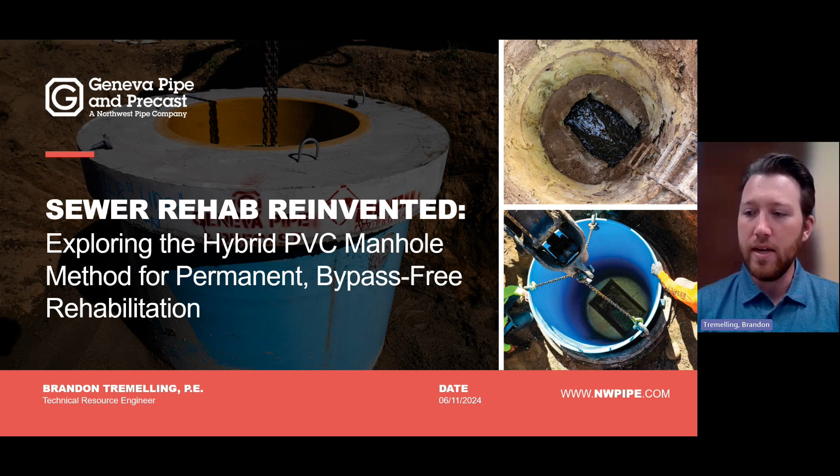So with that, I want to move into our agenda. We'll start off by talking a little bit about this PVC manhole system. We're going to watch a short video that will hopefully lay a foundation for us to build our discussion upon. We have a number of panelists here that we will then be bringing in to discuss the history and decision-making process about selecting this particular product for the rehabilitation of some manholes in the city of Surprise, Arizona. We'll talk about these materials specifically, this product specifically, and the development of it.

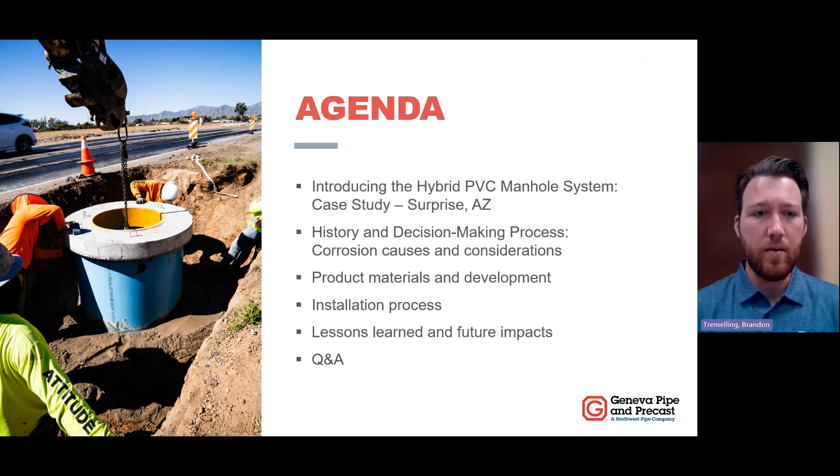We have a representative from the contractor who can speak to the installation process, and we will try to focus this towards lessons learned and future impacts and applications so that any of you who are dealing with current concerns regarding your sanitary sewer collection systems or any design work you're doing, hopefully this information will be made relevant to you.

So with that, I want to now introduce our panelists, and we'll bring them on screen now for you to see their bright and shining faces. And I will ask them to unmute themselves and introduce themselves and their role and the perspective that they're bringing to our panel discussion today, touching on how your background makes you suitable for discussion on this topic. And if we could, we'll just go down the list here. So Chris, would you mind leading us off?

Sure. Thanks for having me on the panel today, Brandon. So my name's Chris McDonald. I'm the president of CPM Pipelines based in Phoenix, Arizona. We were the first company to really introduce this system to the market several years ago and have probably installed close to 500 of these systems with different contractors and agencies across the Southwest and Texas over the last few years. So we've had a lot of experience, learned a lot of lessons along the way, and looking forward to talking to you more about it.

Levi. Yep, I'm Levi Hawkins, project manager at CPM Pipelines. My background's in a lot of pipeline and structure condition assessment and rehab. So I was involved in this project really from the development stage all the way through to the execution, including being out there on site.

So we're out here in the city of Surprise rehabilitating 2 gravity sewer manholes. These manholes specifically were chosen because there's a 24-inch force main that discharges just upstream of the first manhole. So as you may know, with force mains, there's a lot of flow and a lot of caustic gases that get introduced into the gravity system. So with these manholes being so near to the discharge point from the force main, they're undergoing significant corrosion and degradation from the H2S gas.

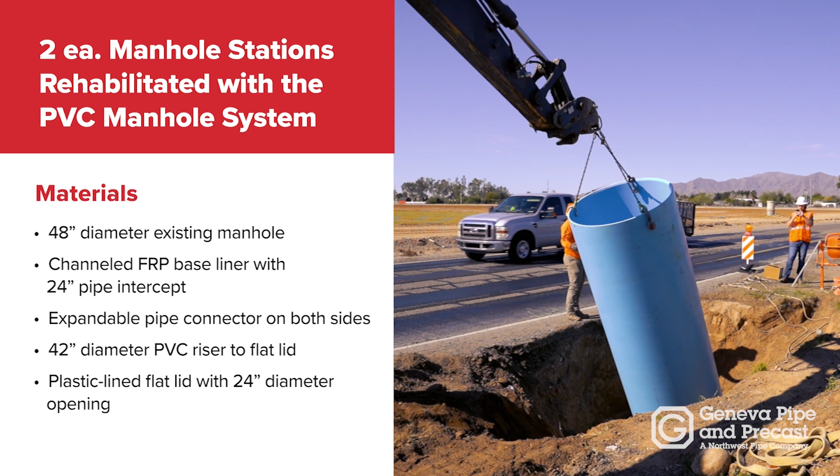So the City of Surprise, our client, had some options for methods of rehabilitating these manholes. A popular choice is epoxy coating, but with manholes that are seeing this high level of degradation, an epoxy coating can last as short as 2-3 years, maybe 5 at the most, and then you're back out here epoxy coating it again. The Geneva method for manhole rehab with the fiberglass bench and the PVC riser is a lot different than epoxy coating because it's a structural rehabilitation and it's made to last 10 to 20 times longer than an epoxy coating.

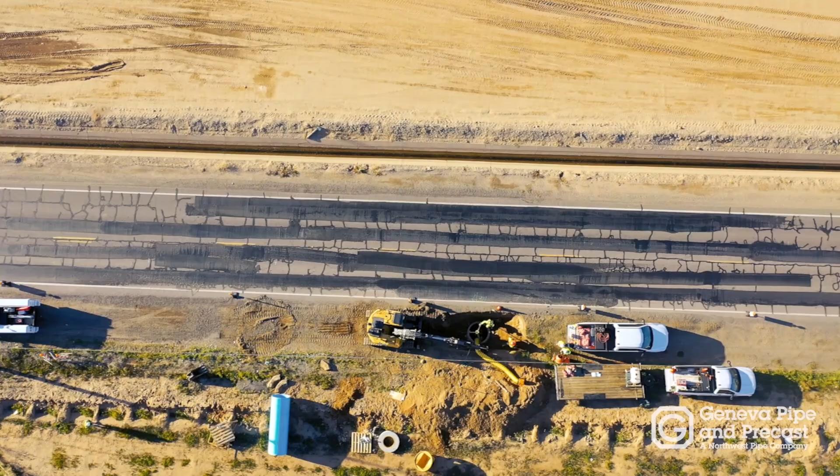When it comes to installation for this type of rehab, in my experience with epoxy coating, the sequence of events is you're pressure washing, you're putting in new grout for the epoxy to bond to, and it can take 2 to 3 days to do that.

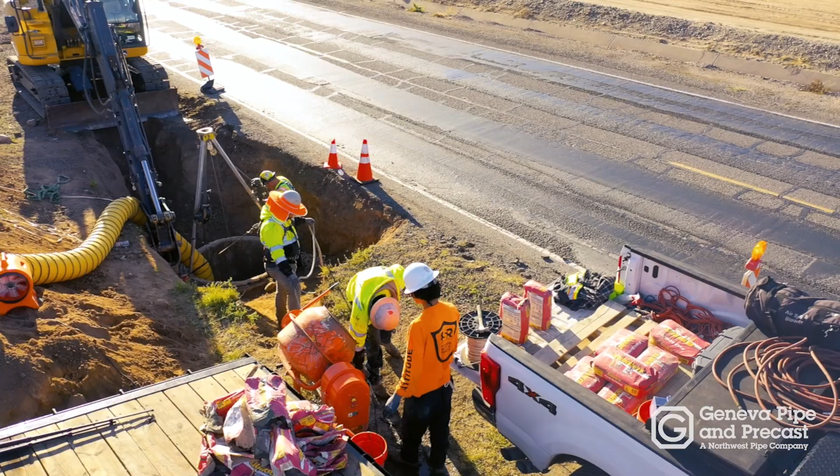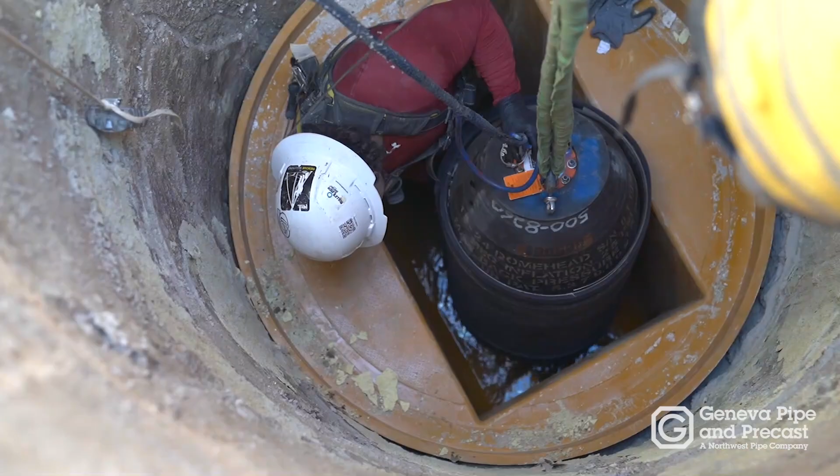We were out here starting on Monday doing our 2 manholes, starting from excavation and removing the cone, and we're here on Wednesday and we're just wrapping up our second one. So as far as a time frame, it's on par with other rehab methods, if not a little bit faster with how fast the pieces stack up.

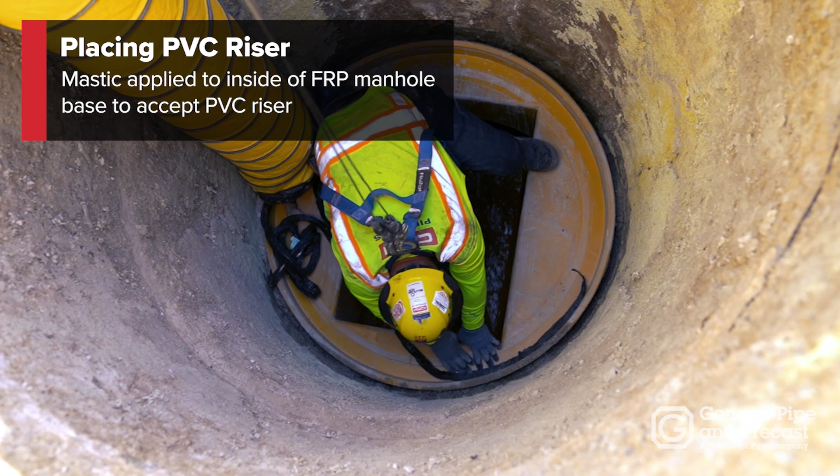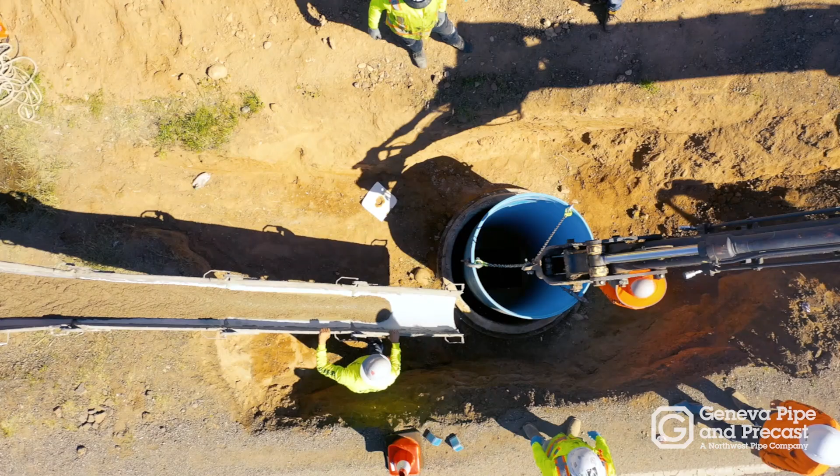I've done a few projects with this method, and I think really from start to finish, it's very straightforward. Putting the bench in and then stacking the components on top. It's really hard to make mistakes or get hung up on any real tricky parts of the installation.

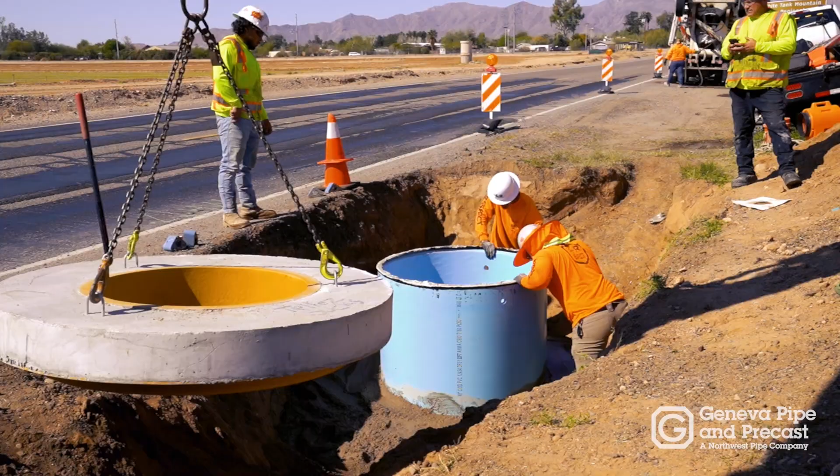We're really lucky this time to have a couple representatives from Geneva out here to kind of point us in the right direction on stuff and take notes, and frankly their willingness to take what they learned and our feedback here in the field to improve the next one is great for contractors and engineers like us.

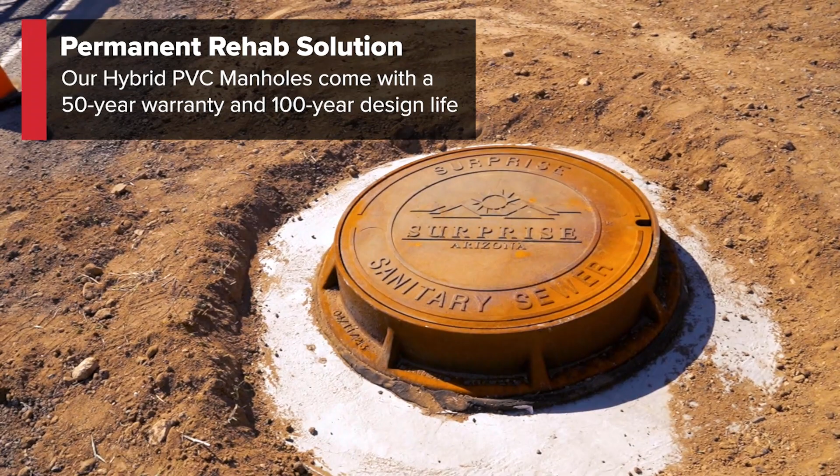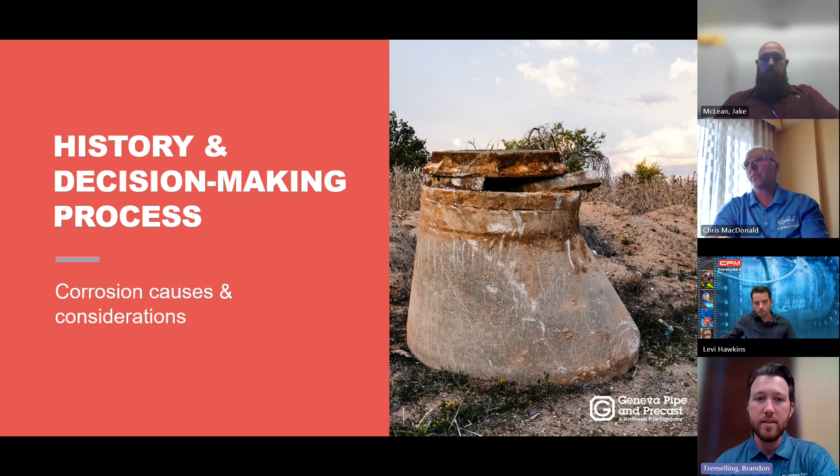All right, so now we want to dive into the history and decision-making process regarding these manholes specifically and what went into the decision to rehabilitate instead of replace. And again, we invite all of our panelists to contribute as you see fit. So the first question I have for our panel is, can you provide a brief history of these corroded manholes and why they specifically needed rehabilitation, maybe in terms of placement in the collection system?

You want to talk, Levi, or am I up? I'm assuming I'm taking this one, right? Yeah, go ahead, please. All right. I'm still cringing from watching myself in the video, so.

So we've been working with Surprise for some time, and we've been talking about these specific manholes for quite some time as well. We had actually performed a rehab from the bench up on a previous manhole about 1.5 years, 2 years ago. So the main factor that they were considering when it came to choosing between replacement and trying to do a full rehab from the invert up with a 50-year warranted, corrosion resistant, 100-year design life type system was you've got so many more factors. If you try to start pulling manholes and replacing manholes, you almost inevitably have to set up a bypass system.

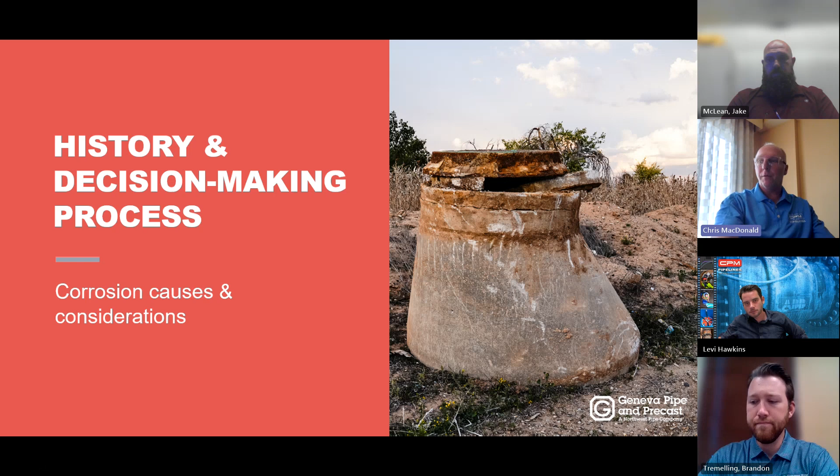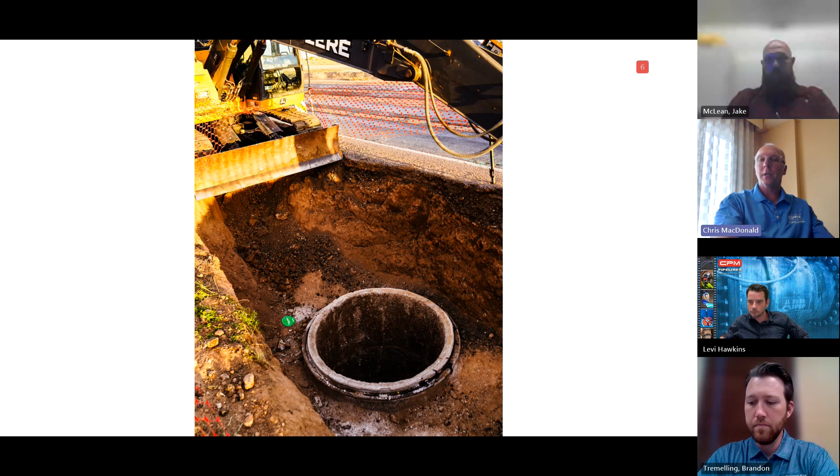So from the minute we started developing this system, like I said, it's probably been almost 5 or 6 years ago, our goal was always to try to figure out how to do this as quickly as possible and avoid setting up a bypass. So what we were finally able to do using the Q's lock couplings, which we'll probably talk more about later, was come up with a way that we could get those Q's lock couplings in and get that bench in place really quickly. So we didn't have to put the system on bypass.

So that probably saved a day on the front end, a day on the back end or more, plus some significant cost. So once you factor that into it, this is basically building a brand new structural manhole inside of the existing structure. So the excavation's much less. There's no bypass. We figured out a way to do these quickly, typically within a day with no bypass. So I think that was probably the main consideration.

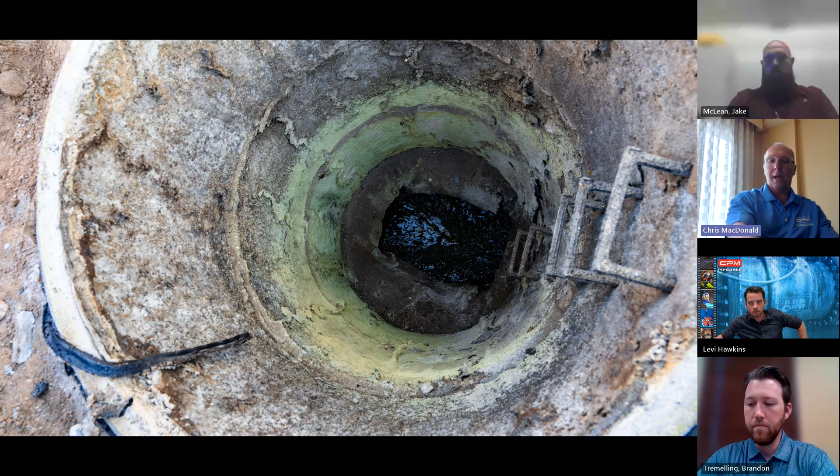And then, as Levi's mentioned, he's had a lot of experience with epoxy systems. And there's some great companies out there that do a great job of putting epoxy systems in, but it all comes down to the prep work. So you're really leaving a lot of things to chance and having to be validated and verified and QA/QC'd in the field. So what's great about this system, everything's built in the factory. So you get a factory built, factory designed system that's fully structural, quickly installed, no bypass, cost savings.

We're looking at some other structures up north where we're looking to do our first one out of about 10. And we actually compared that side to side with replacement that included bypass, and we were significantly less expensive, probably 25 to 30% less expensive than what it was going to cost to bypass. And this specific project in Surprise would have been much the same.

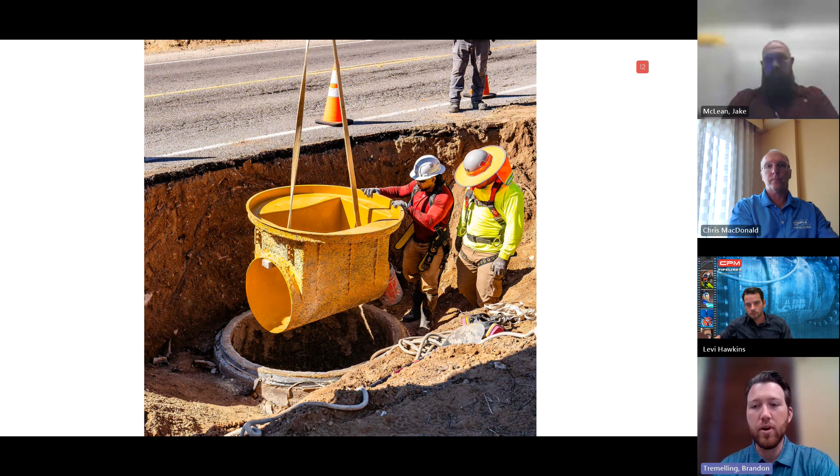Awesome. So yeah, absolutely. Bypass pumping can immediately cause the cost of any project to tremendously increase. So how much value would you say the city determined the speed of installation, or rate of installation, and the lack of a need to bypass, in terms of value against any other options considered? I'll let Levi take that one since he was out there on the site most of the project.

Yeah, from a time perspective, if I'm understanding the question right, like I said in the video, when you're doing a coating, you've got to wash away anything that the epoxy is not going to bond to, or really your grout that you're putting back on there. So that can be a day, right? Just in itself, just washing them, and then you've got to come back and grout it to make sure there's a good surface for the epoxy or whatever coating to bond to, and that's got to cure, right? So that's another day for that, and then you're coming back and coating it.

Now, obviously, you're doing this on more than one per day, but all the value that there is in this system, I can't overstate how doing it in a day and a half each is, it just doesn't compare. Gotcha. Now, were there any hurdles in that decision-making process? When working with the city and proposing various options, were there any concerns or anything of that nature? I can't necessarily speak to that. I know they were familiar with the system, so it was something that they had seen. But I'll let Chris chime in.

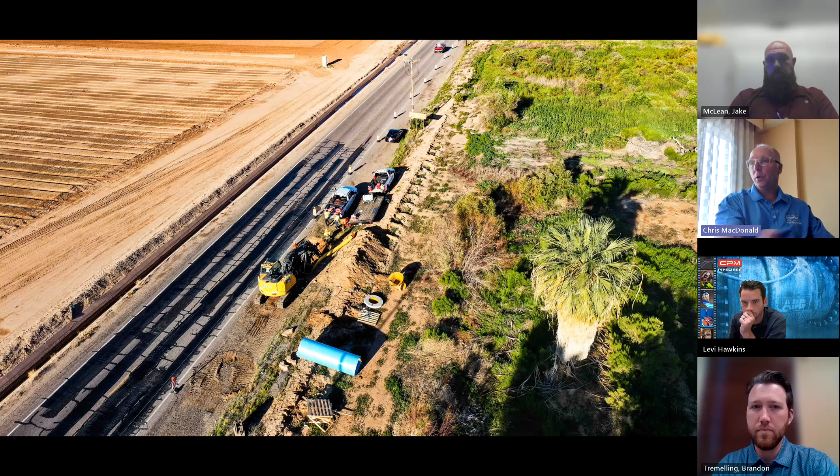Yeah, this is in a part of town that's fast growing, and the road that it's on now isn't a major road, but it probably will be in the next 4 or 5 years. I don't know what the schedule is as far as widening that road and building that road out to deal with the growth in the area, but they don't want to have to go back. These manholes weren't that old. They've got a major line going down this roadway, which is 24-inch diameter, coming from the force mains that discharge into it. So they just didn't want to have to go back to this manhole again. So I think that was the biggest benefit for the city. They wanted to spend the money because it's a little bit more expensive.

If you take the bypass out of the equation and just look at the two systems in and of themselves, you might save 10, 15, 20% on just simply doing an epoxy system of some type. But over the course of 10 years, you far exceed the cost of this system because you have to go back and do it again. You have to set the bypass up again. You have to do the epoxies. You might not be able to fully rehab the bench with an epoxy system. Typically, they'll just go down to like the flow line. So those were some of the things that we were thinking about. Just long term, we don't want to be back in these structures again. This is probably going to be one of the last chances we have to do something permanent to repair them.

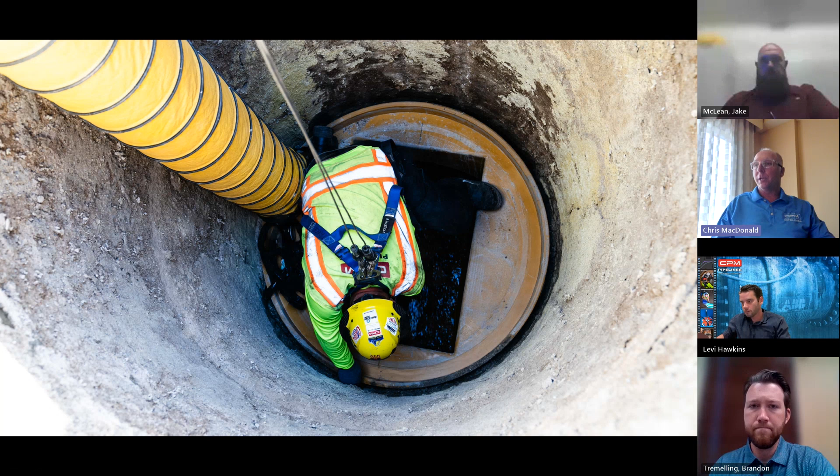And this is the most permanent system that can be effectively put in as quickly as we did, which took about a day and a half. Keep in mind, this was the first time this contractor had put this system in, and for them to get this done in a day and a half was really remarkable. I think the next time, given the exact same circumstances, situation, size, everything else, they get these done in a day probably. Excellent.

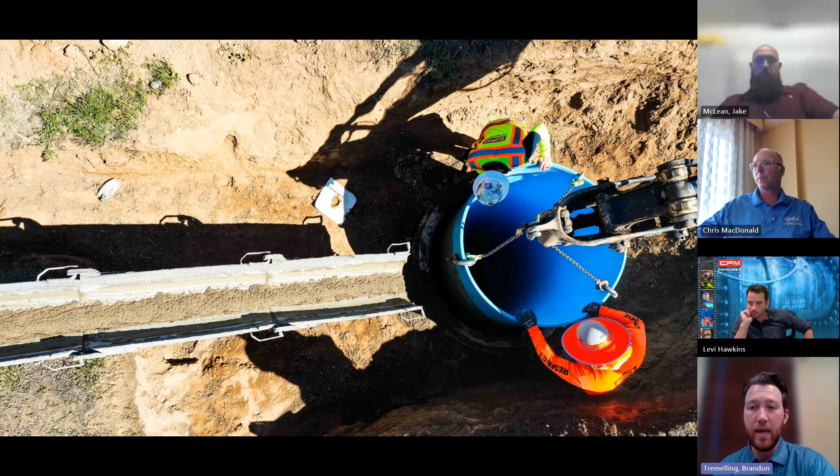Going back to the questions though, I'm just wondering in terms of your experience, Chris and Levi, having installed many of these systems over the years, how did this manhole stack up in terms of the level of corrosion that you saw here?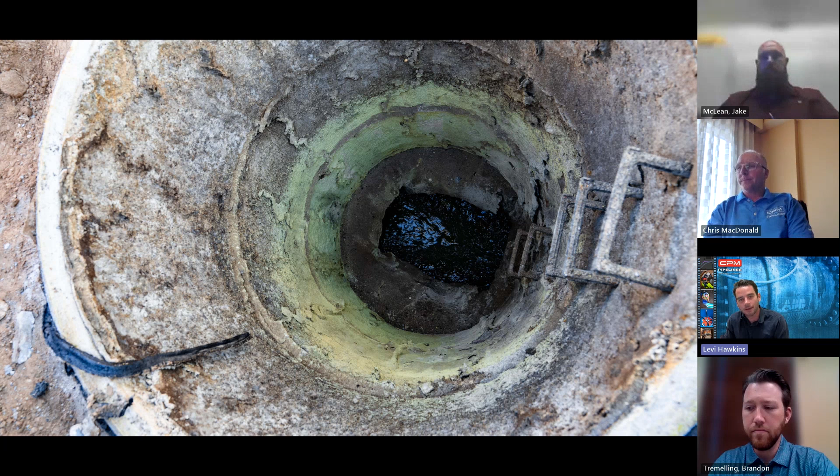At what level do you typically suggest looking at that permanent rehab option versus maybe more short-term solutions? Honestly, for me, these were some of the worst that I've seen. Even looking at the pictures you've got on the screen right now, this is what it looked like when you open the lid. Going back to some other rehab methods that involve cleaning with high pressure water, I've seen manholes that look better than this, frankly, that you start washing it and all of a sudden you're getting dirt inside the hole. That concrete's just rotted all the way through.

And the gases, and it really goes back to that decision-making process because some of the more short-term solutions for these, when you've got this level of gases, and I was standing above it. We had 2 blowers in there and our air monitors were still going off every 30 minutes. We had to pull guys out. So when you've got this kind of environment, it was the right solution for it, for sure.

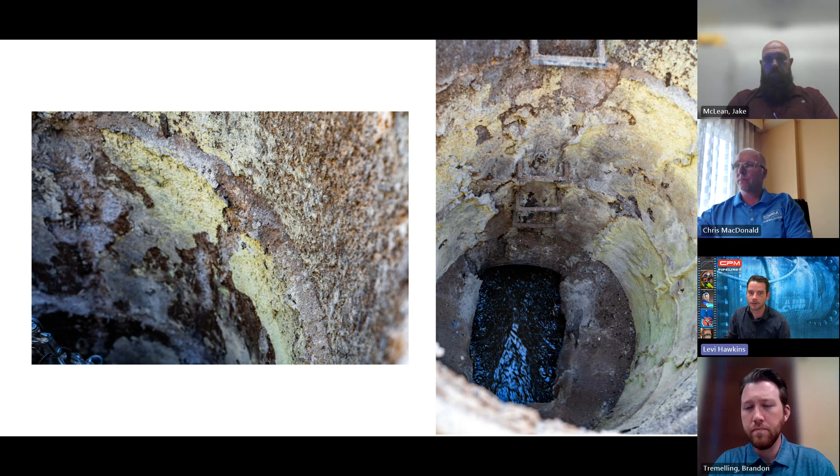Absolutely. And we'll get into speaking about the materials that are involved with this product and its design considerations. But Chris, I believe you said earlier that this manhole got to the point where you were considering that there was a last chance to prevent this manhole from being replaced versus rehabilitated, likely due to the level of corrosion that was being seen here. Am I right? Yeah, 100%.

And Levi makes a good point. I lost my train of thought as I was listening to finish up what you were saying.

But a lot of times when you inspect a manhole, a level 2 manhole inspection doesn't require somebody to actually get into the manhole and start poking around with a screwdriver to figure out really how bad it is. It's just a visual inspection or a scan. So I'm curious.

Levi has a lot more experience with manholes and doing inspections and then going out after an inspection was completed, maybe a scope of work was put together, then what they get into once they're on site, thinking they're going to repair it, maybe with epoxy or just with the skim coat of grout over the top to prep it. What kind of problems does that cause, Levi, once they're out there ready to execute a scope?

That's perfect. And that's something I've been saying for years, honestly, and not to knock the assessment process for manholes, but you're exactly right that doing a level 2 inspection and noting that maybe there's some mortar missing, or there's a crack or the ladder's corroded, whatever it may be. And you slot that to be rehabbed with an epoxy coating because you don't think it's that bad.

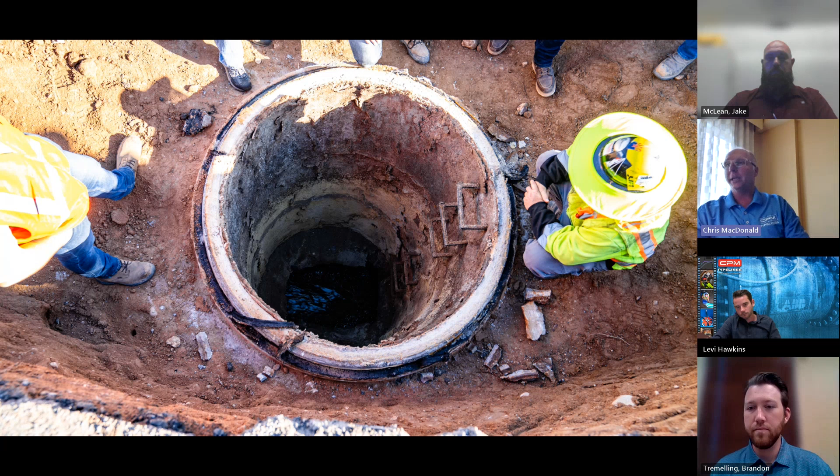Absolutely. And that's a perfect segue to speaking towards the materials and the design of this system, because I'm sure most of our attendees here just said, wait a second, you're poking straight through the wall of the manhole, you're hitting dirt, and you can still rehabilitate it, because that sounds pretty questionable.

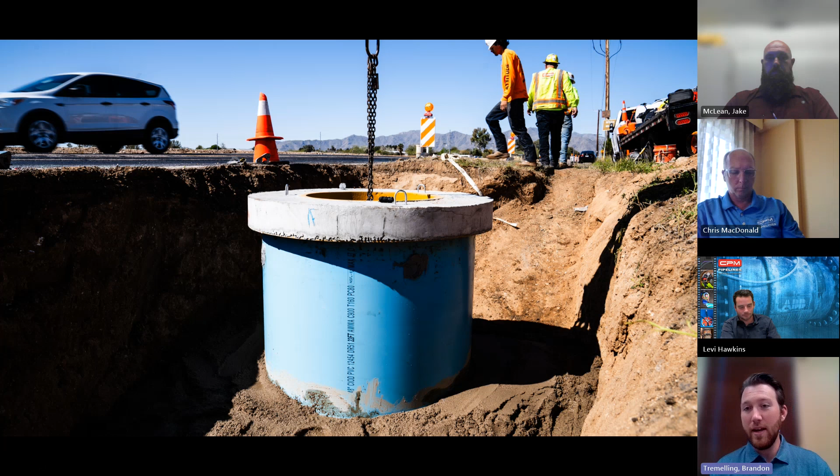But my role here, in addition to being moderator of this panel discussion, I am representing the manufacturer side of things as well. So I'm going to spend some time speaking about the materials that are used in this system and why they were selected, in addition to the design.

Again, rest of the panel, please feel free to jump in. We're going to have some specific questions for Jake here in a second. But I wanted to speak to the materials that are used and their specific corrosion resistance.

So as you can see, in this photo that's shown right here, there are a couple of materials highlighted. We've got that lined flat lid, which in this case study was lined with a fiberglass reinforced polymer. The riser section of the manhole was lined with large diameter PVC pipe. And these materials have been extensively tested for their corrosion resistance.

There are various tests throughout our industry that can be recognized for determining the properties of materials when exposed to various types of corrosive elements. And the one that we as a manufacturer have determined to use, just based on its reputation in the industry, is what is known as the pickle jar test from the California Green Book, which essentially we take samples of all the materials that are used in the system and we isolate them, subjecting them to exposure for various corrosive elements for a period of time.

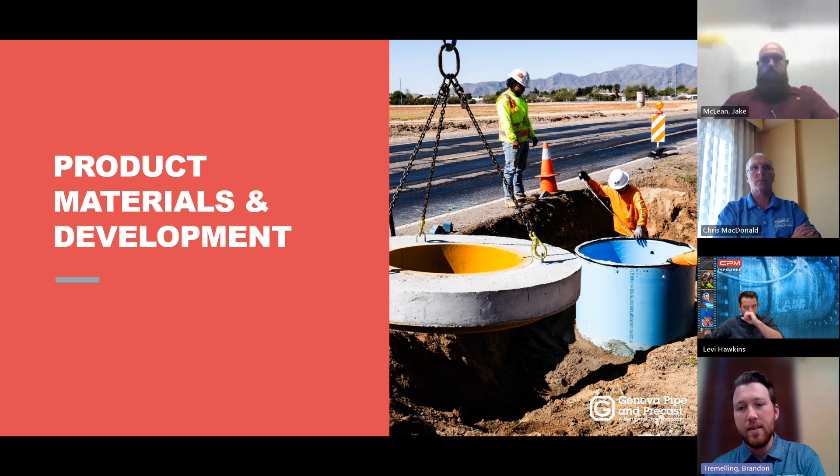Now, above and beyond that, what Chris was just speaking to, if you have a structural concern with a manhole that you're trying to rehabilitate, there's always the concern of, well, if the existing wall doesn't have much structural capacity left and we're literally hitting dirt or we're seeing exposed reinforcement, how does this system compare? Well, one of the things that is incredible about this system is that the pipe that was selected for the riser section has been tested and third-party engineered by a couple of different consulting firms at this point to determine that this system is fully capable of withstanding AASHTO loading, regular traffic loading, in and of itself, making the strength and structural capacity of the existing structure irrelevant.

So what we're doing here is we are essentially building a manhole within a manhole so that the level of degradation that we have previously seen due to corrosion no longer is relevant in any way, because that inner manhole, this hybrid PVC manhole, now is taking all that loading and is capable of providing that strength and structure in and of itself.

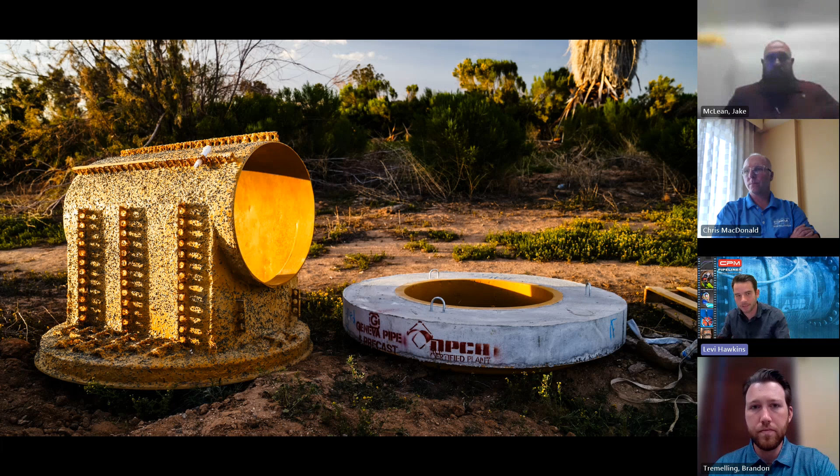Now, a few of the unique design features, maybe Levi, I'm not sure if you were involved in this process, but can you speak at all to how this system was specifically modified for these manholes in the field? Yeah. So, like I think I answered in one of the questions in the chat, we actually had a 3D scan that's sometimes used for condition assessment, but in this case, we used it really just to recreate a point cloud of the manhole, such that all of the intricacies and nuances of the bench and the channel, and not just when it was designed and installed, right? All the things that have happened to it over time that change its shape or change the diameter of the incoming and outgoing pipes. That's all accounted for.

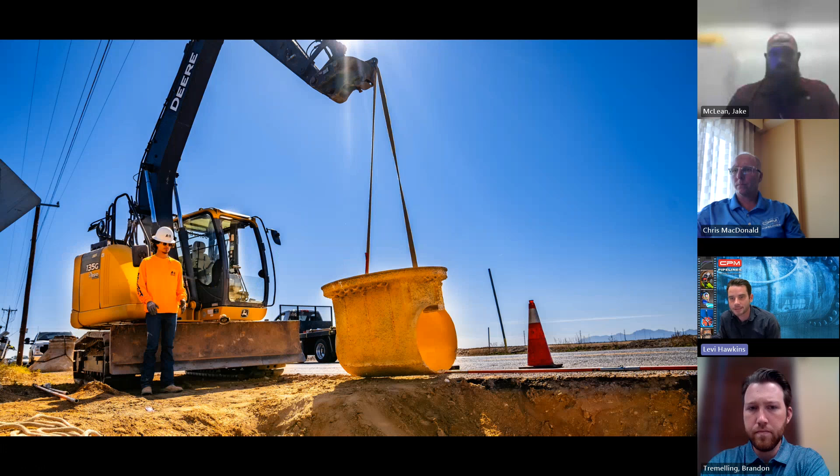So that one piece bench liner that you probably saw in the photos or in the videos, those aren't just off the shelf based on the pipe diameter. That's a completely customized piece that literally drops right in and fits. Now, I've had times where you have to make a couple little adjustments to it, shave a quarter inch off one side in the field, but really it's a snug fit. It drops right in, and then the riser, like you said, that's just a piece of PVC pipe, and then the flat top fits right inside it on the top.

Jake, this is where I'm going to ask you to jump on. Just as a reminder, you're currently muted.

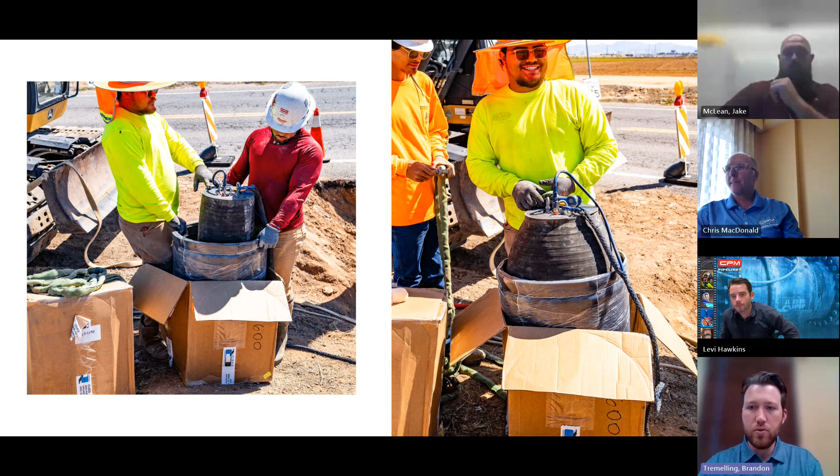But I just wanted to ask you or our other panelists, if you want to answer this question, how were these inert materials joined to the pipe? And can you kind of speak to that process?

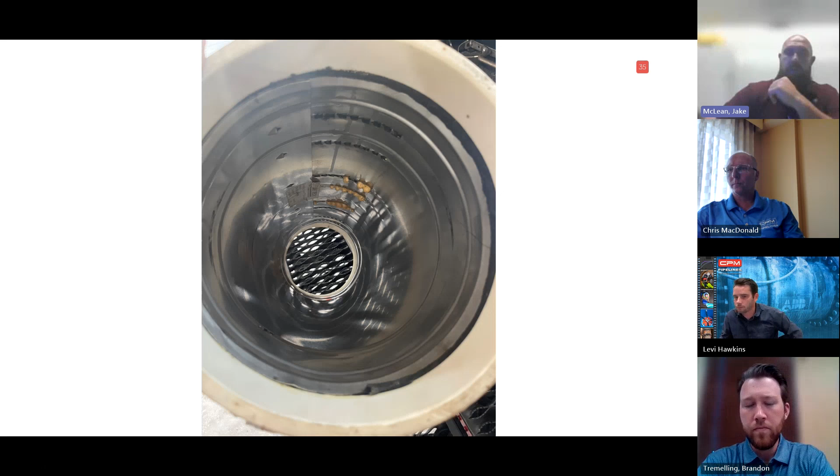So the sleeve itself is constructed out of 316 stainless. That's been proven to have a 100-year service life in these corrosive conditions. And then the material on the back side of that is a polyurethane grout. Water activated, expands 12 to 1. That helps to seal off any gaps there and also bind that metal sleeve to the host pipe.

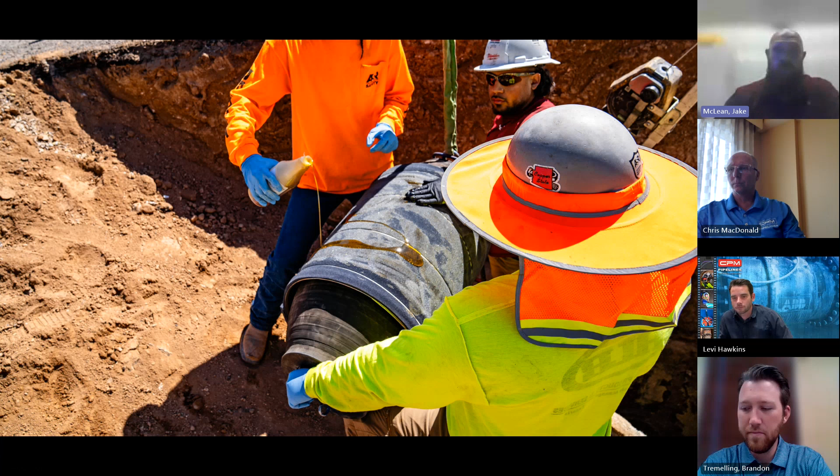Okay, awesome. How was that installed? In this case, it was installed with just a regular plug. If you were installing it in the middle of a line, you'd have a wheeled flow-through packer. You just need something that'll blow that thing up to the specified diameter. So in this case, when it's right outside the manhole, you don't need anything fancy. Just the correct diameter plug is all you need.

Okay, and in that previous photo we saw there, they were saturating the outside with a type of resin. I think you mentioned that briefly. Can you kind of speak to what that does in terms of any sort of corrosion protection or adhesion, or what is that really doing in this connector? Yeah, so a little bit of both. So what that does is, like I said, that's a single part polyurethane grout. So when exposed to water, it expands 12 to 1.

So the primary function of these sleeves is structural. Fixing crossbores, separated joints, connecting pieces in this case. But that will expand through any voids, cracks, gaps to help seal off against that infiltration and also to kind of limit where those corrosive gases can travel. So that provides a barrier there.

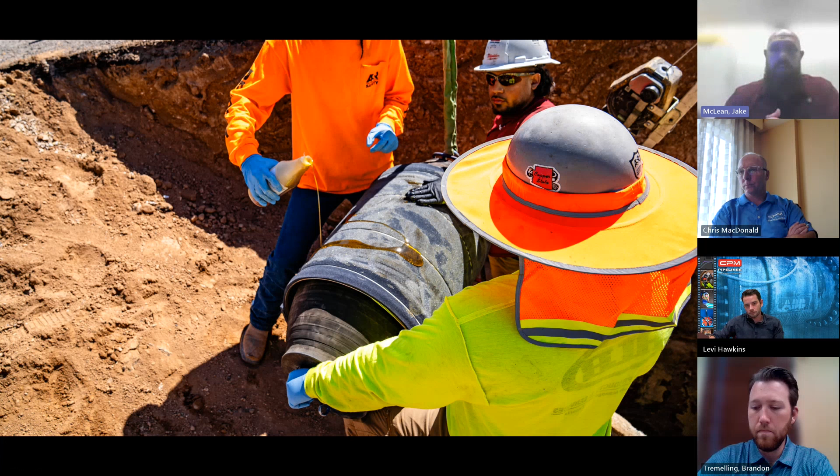And then also, just in layman's terms, the Great Stuff foaming door and window sealer at Home Depot. This stuff chemically is very, very similar. So if you've seen how that works, it expands, it gets very rigid. While it's curing, it's extremely sticky. So that provides a very nice bond to the host pipe.

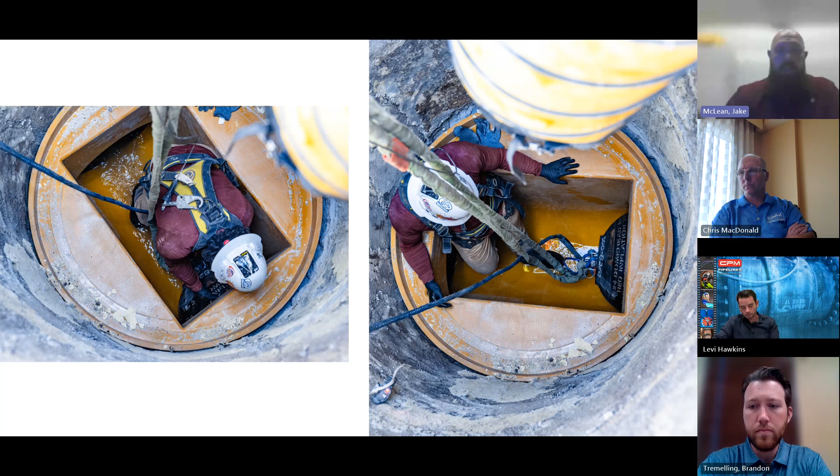Okay, so we're providing kind of a structural connection between the pipe and the liner to provide that protection against those corrosive elements. Can you speak at all to any sort of testing for corrosion resistance that's been done on these materials or on the system as a whole? On the system as a whole, specifically, I have a document here where it was tested to a 100-year service life. And that was done by Arthur H. Tuthill, PE, out of Blacksburg, Virginia.

So this study is a pretty detailed study covering the long-term corrosion behavior of 304 and 316 stainless steel specific to the repair of municipal sewer lines. So it does have a lot of documentation backing it up and how that was done. And like I said, most of your corrosion resistance, the study is specific to the grade of stainless steel used.

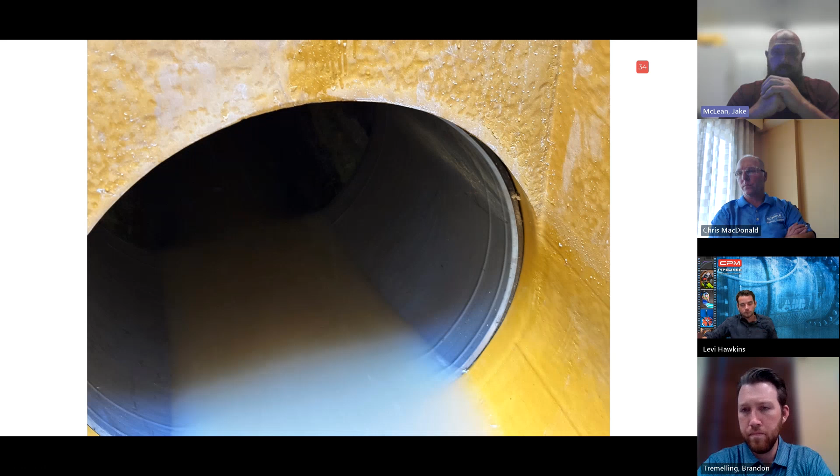Gotcha. Makes sense. Can I ask what sort of sizes the Quick-Lock system comes in? 6-inch diameter, 12-inch length on the small end, 48-inch diameter, 36-inch length on the big end, as far as installed with the packers or plugs. Anything above 48-inch diameter comes in multiple pieces, and you would actually walk that into the line and install those by hand. You'd have 2 pieces at the bottom that stack in, and then the piece at the top is a hinged plate that expands to provide that last piece of the puzzle.

Gotcha. So regardless of the pipe sizes, as long as it's not smaller than that 6-inch size, it's a suitable system for joining these corrosion resistant materials together to prevent any further corrosion from taking place. Is that correct? Awesome. Okay. Has there been any sort of testing done on this system for its infiltration resistance? Not that I know of. Again, primary function is the structural.

It does help with infiltration based on that grout, but that's a hard one to quantify, because you're applying the grout to the outside of the sleeve. You're dragging it in place in many cases down a sewer line. Depending on how that goes, you could be rubbing some of that material off.

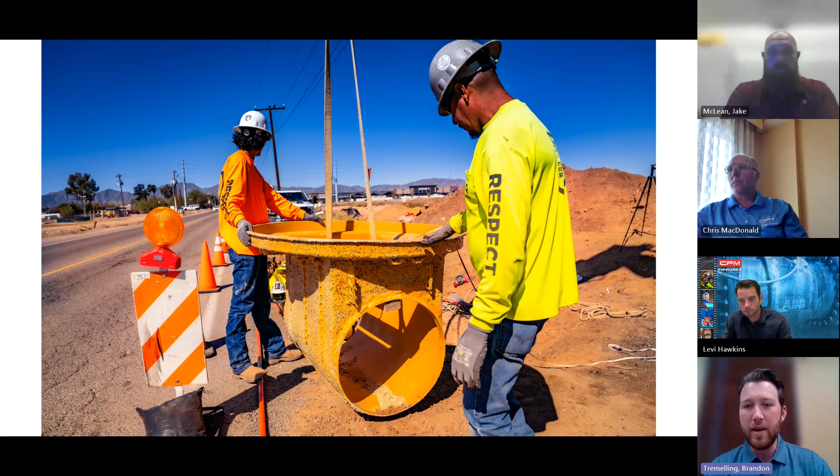We've spoken a little bit about this idea of permanence in rehabilitation methods, and I wanted to take a moment and recap one study in which a manhole base was taken out of service that had been previously lined with this material, with a liner much like the one you see in this photo. It had been taken out of service after 20 years in a standard sanitary sewer collection system. Cores were then taken of the manhole base straight through that liner, and those cores were sent to a third-party testing agency to determine the level of health, or conversely degradation, that had occurred on the backside of that liner after 20 years of service.

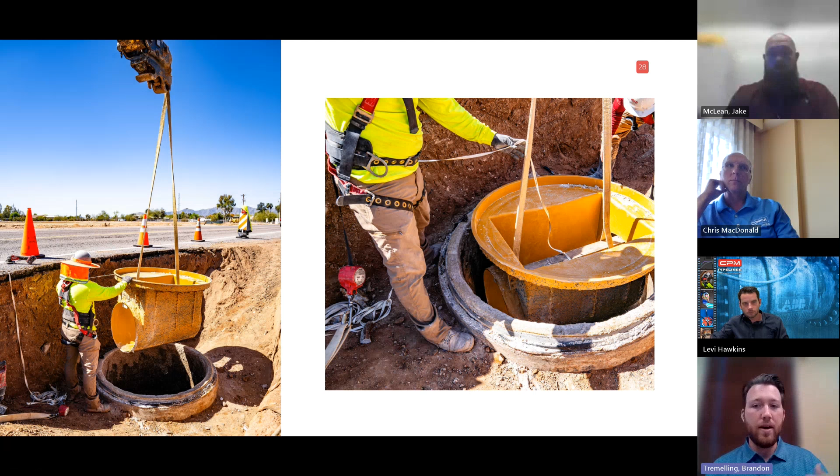And essentially what was found was that after those decades of service, there was essentially no variation between the strength and health of that concrete on the day those cores were taken versus the day it was first installed. So that is what has led to this idea and discussion of permanence. When we're talking about a manhole that is very significantly corroded and requires rehabilitation that is going to withstand its 100-year lifespan, that is where some of that information is coming from, the data that's been collected. So there's a very high degree of confidence in this message that these materials are going to withstand even the harshest conditions.

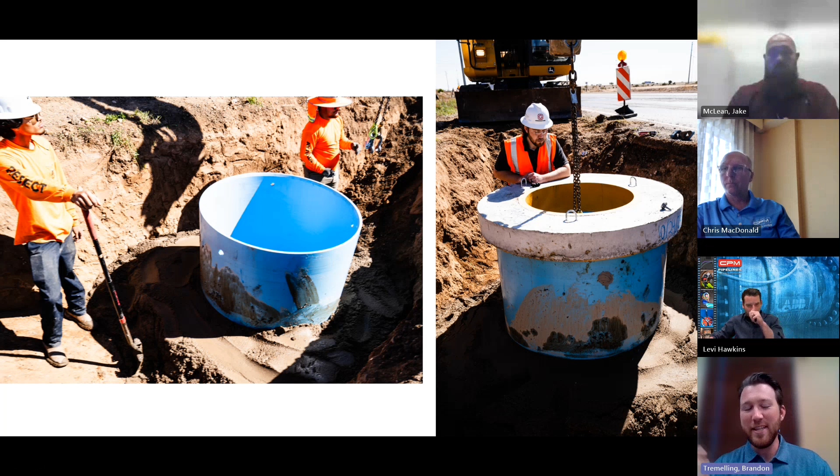I mean, Levi, you said that in your experience, this was one of the worst manholes. And I had the good fortune of being on site to witness this installation. I actually told Levi yesterday that I took a video of one of the contractor's guys down in the hole just using his hand to brush concrete off, and it was pretty incredible, the level of degradation that you can see in just a few short years in some of the harshest environments.

I spoke again about the structural considerations of this method. Now, as you can see here, and as Levi mentioned earlier in his video, on that first day there was some excavation done and the cone was removed. As you can see in this photo, there's no cone replacement. And while there is some loss in terms of the height of the manhole when you remove the cone, that is made up with this riser that protrudes from the next section that remains in place.

Now, what I mentioned earlier about us having gone through the method with various consulting engineers and agencies to do the loading calculations and determine that this PVC manhole system is capable of withstanding the AASHTO loading, the traffic loading, without any additional reinforcement around it once it has been properly backfilled and compacted.

So even though there is no cone, there's no concrete riser around that remaining portion of the PVC pipe, it is then, once backfilled and compacted, going to be able to withstand any standard traffic loading in and of itself. So a pretty incredible system there. I don't know if Chris, Levi, Jake, if any of you have anything else to say about these product materials, their design or corrosion resistance or anything else like that.

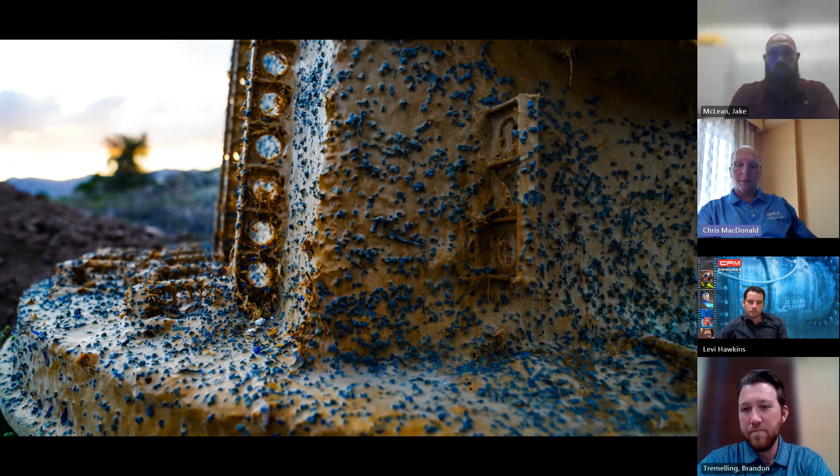We also did a really big project down in southern Arizona a few years ago. One of the first real big projects we did, I think we had 30 or 40 manholes. And those actually had double cone sections, so it had one cone, then it branched out and had a second cone. So we had to remove 2 full cone sections. These were 15 to 20 foot deep manholes, so we had to dig them out a little bit deeper.

But we probably had, in some cases, 10 feet of PVC risers sticking up from just the bottom barrel section of the original structure. And a lot of those were in a roadway in southern Arizona as well. But same idea, they're H20 load rated for traffic. So once you backfill it, put slurry back around it, or just compact it and backfill it, these things are just like putting a brand new manhole in.

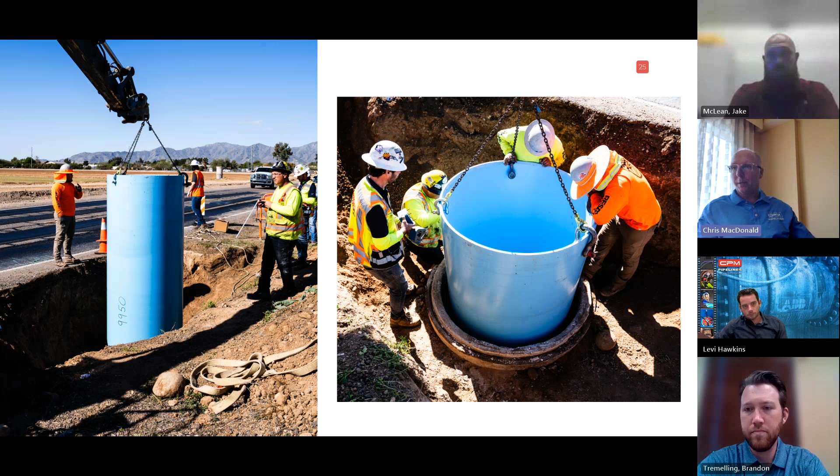And I think that's worth mentioning as well. We use these same components to build brand new manholes, with basically the only difference being the bench section that we're dropping into the existing structure just gets poured into a precast base, and then it just stacks out from there. So we can build these exactly the same way with just providing a base as we do to rehab. And those bases look a lot like the flat top, right, for new construction? Yep, they do. Absolutely.

Now, because I want to spend plenty of time on the actual installation process, would Levi or Chris or both of you speak to what that installation process looks like for this system? Yeah, I know we touched on each piece individually, but starting from the beginning, in this specific project, we probably excavated maybe a 6 foot by 6 foot trench down to the joint where the cone sits on top of the barrel section of the manhole.

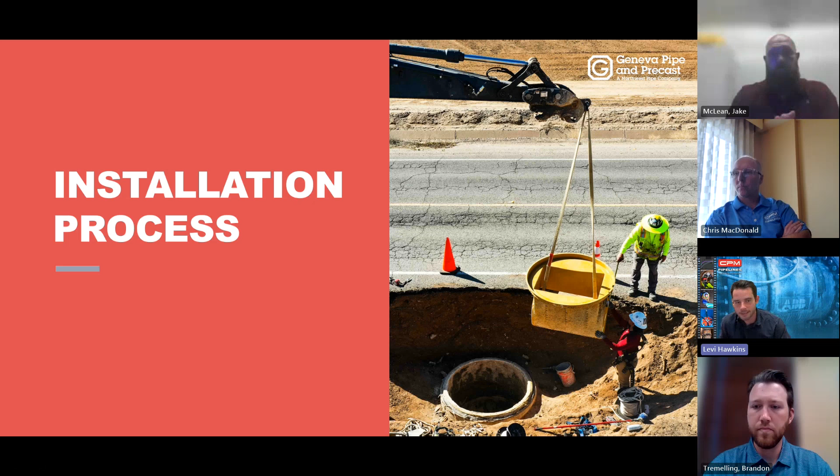Pull the cone off, it's done, go into the junkyard. And then it's a matter of dropping that bench piece in, getting that lined up, putting the Q's lock couplings, which lock it. And what they also do is prevent, because we'll pour the grout behind the bench liner, so those Q's lock couplings also prevent grout from seeping into the system and getting washed downstream and, you know, making a bunch of problems.

We'll let that bench grout set up a little bit before we start dropping anything more heavy on it. But within the same day, we put some mastic around to water seal that interface between the bench and the riser. Drop the riser piece down, mastic around the top of that, and then the one piece flat top. And from there, it's just a matter of using the right grade rings to get it to the grade that they want. In this case, they wanted it a little bit higher than the original manholes were for some flooding issues that they were seeing in the area.

But I mean, if it sounds simple, it's because it is. It's essentially 3 pieces that you're stacking up. Gotcha. And I think the other thing to mention in that same vein, you don't have to have any specialty equipment. There's no special training required as far as learning how to use spray equipment, learning how to properly mix grout and different components that you have to try to get to stick on the walls. So really any typical civil contractor that you've got out there that you trust and you work with can put this in just about as easily as they can install a new manhole for you.

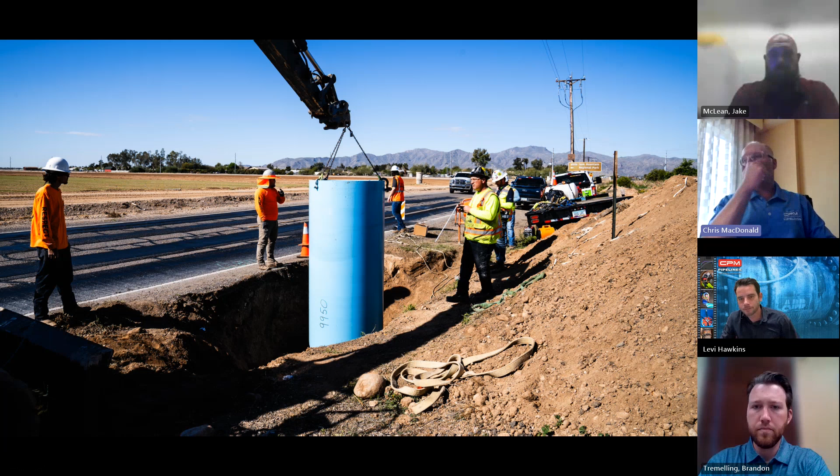So it gives you a lot of different options as far as getting these put in the ground. And it gives you a long-term solution at the end of the day with, like we've said before, little to no QA QC required in the field. Once they stack them, they put them in, you don't have to go back, you don't spark test this stuff, you don't do pull tests on this stuff. You get it from the factory exactly the way it goes in the ground. It gets dropped in the ground piece by piece, and it's going to be exactly the same every single time, 100%.

And just to add on to that, Chris had mentioned before that our civil contractor, this was a first for them. But even internally with CPM, I was really the only one out there that had even really seen this be done before, let alone install one. And all our guys picked it up. If I sent a crew out to go do another one without me or without anybody that's seen it before, I have 100% faith. Awesome. Yeah, thank you for that recap.

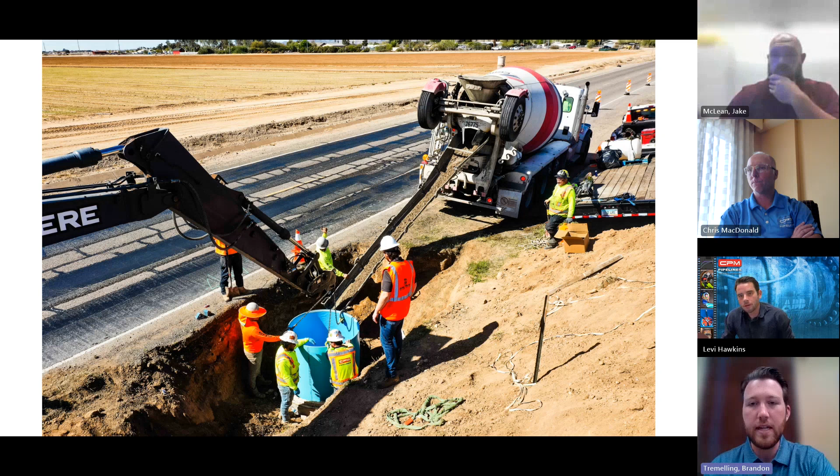Can you talk about any management processes that were in place to make sure that this project stayed on track? What was the expected timeline for start to finish, and how did that match up to the final tally? Yeah, so I think we had a week total set aside for it, and really by Monday we knew we were gonna crush that. We were pouring concrete collars Thursday morning, which actually got added to the scope. So essentially we did it in 3 days, when planning for 5.

As far as management, I'm sure there's some people in here with experience with this. Anytime you've got material coming from out of state, you've got a contractor that you're working with for the first time on the type of work that you're doing, and we had material getting stored at a yard a couple miles away, just all the typical time management, making sure people are aware of what the next steps are and making sure the contractor understands what they're doing, and really just being there personally, and not being in the truck trying to work on other projects that I have to do.

But being there, getting my hands dirty, making sure I'm there to answer questions or keep things moving. But you know, all the material came in one delivery, so we knew we had everything that we needed. Had a good contractor. Really just blew this one away, in my opinion.

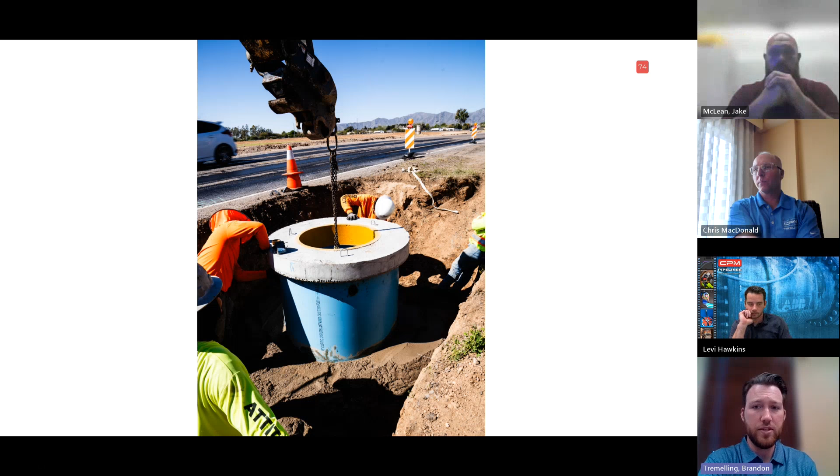Yeah, and kind of speaking to what you've mentioned, and Chris, you mentioned as well, just the simplicity of it, there's not really specialized training that goes into this. There's only a few joints total that need to be sealed, and just sealed with mastic. It's pretty simple.

In fact, where we're based out of Utah as the manufacturer, of course, we provide the solution nationwide, but here locally, there have been a couple of agencies that I work with pretty frequently that have taken interest in doing this installation and this process in-house, because once they have determined the simplicity of the installation, it has given them great confidence in the solution, in addition to the performance, the loading, the corrosion resistance, and so on. Pretty incredible system overall. Oh, can you go ahead?

I was just gonna say, one way to think about it really is that the riser sections on these, and I might be foggy on it, but I think they were like 18, 19 feet tall. And you think about doing this with a concrete structure where you'd probably have 3 or 4 joints trying to stack something up that high. The riser being PVC, being light, being one piece, we basically accomplished 18 feet of progress in 5 minutes. So just incredible. Yeah, very fast.

And from a safety aspect as well. Yep. When you're looking at this from a safety aspect, whether it's new construction or rehab like we have in this case, if you were trying to stack multiple barrel sections, you'd have to have a person down there setting the mastic and making sure it's lined up. And there's a lot of potential safety issues.

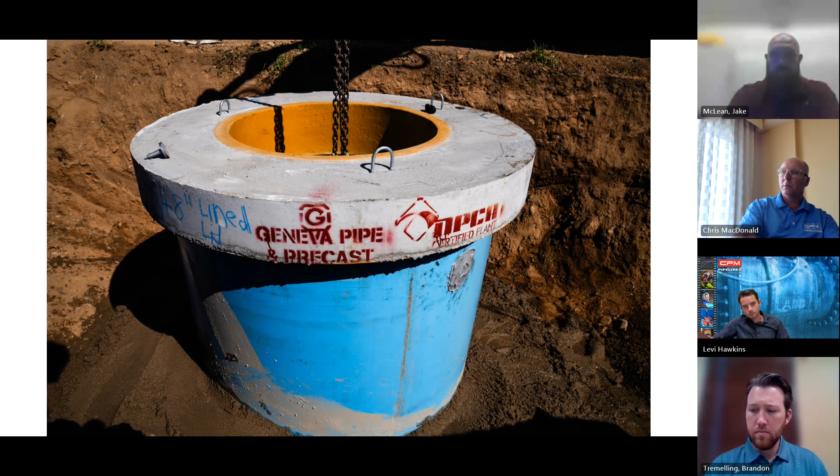And I think one of the questions, Levi, were these 60s? These were 60s, right? We dropped 54s in. Yep, exactly. Yeah, so these specific ones were 60-inch diameter originally. So 5 foot, we put 54-inch, and 54-inch C900 pipe is, I think, 58-inch OD. So we only had about an inch of annular space around the outside that gets filled with slurry or grout when we're finished.

Yeah, I guess we didn't really talk too much about that, but part of setting the riser in, there's not really any potential for error on that, but you do want to make sure you've got some kind of gap between the new riser and the existing one, so that grout has got somewhere to go. But the more corroded the existing manhole is, the more space you're going to have just by nature of what concrete is remaining.

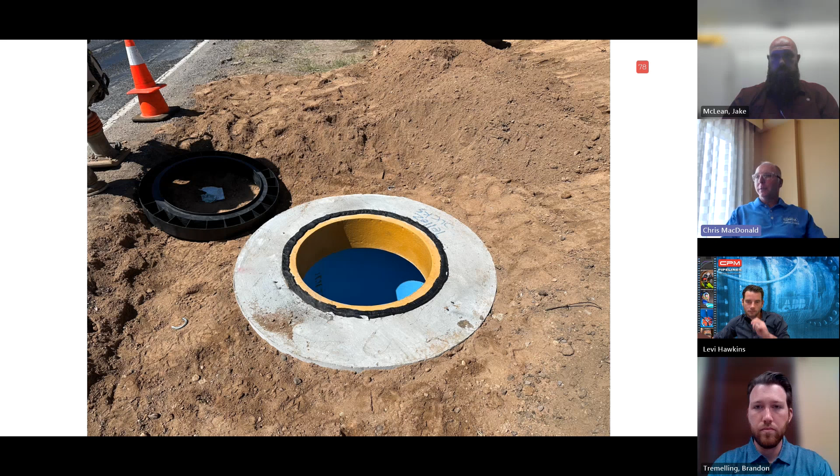Let's see. The inside diameter, I guess I just spoke to that. Cost comparison. Do you want to speak to that, Chris, at all? Yeah, sure. So the cost comparison, again, if you're just looking at somebody coming back, not doing much heavy cleaning, skim coating it, and then putting an epoxy system back over the top, it just depends on what you're trying to accomplish, right? Like, what's the goal?

Is the goal to get a system in that maybe has a 10-year warranty? One of the clients in Southern Arizona, they bumped their epoxy requirements up to a minimum 10-year warranty. So that probably more than doubled the price of what they were paying because they were having manholes last 4, 5, 6 years. They were having to be back out there paying for all this expense again.

So long term, we've done calculations with different systems. We've done it with lift stations and different things, and we've shown that it's less than half or a third of the price long term if you're looking at a 50 to 100-year design life. So it just depends on how you want to invest your money. Do you want to invest it once, or do you want to invest it every 5 to 10 years and deal with the potential headaches and consequences that come with that?

So if you're willing to step up, do it right the first time, make sure it's permanent, this is going to be much, much less expensive over the life cycle cost of the system. Absolutely. Thank you for saying that, Chris. And I also want to point out that with this manhole being as corroded as it was, it's likely that the city realized that they either had to rehab these manholes with something that would be permanent or risk a somewhat catastrophic failure. They couldn't risk using a liner that may have a shorter design life.

And I don't know that it's been said, but maybe Chris, you said it earlier, but this system comes with a 50-year warranty against corrosion. So all these materials are warranted against the corrosive environment that did this to a precast concrete manhole. And so the option to be able to recognize a highly corrosive environment and rehabilitate it once and then never touch it again is invaluable to many agencies that we work with.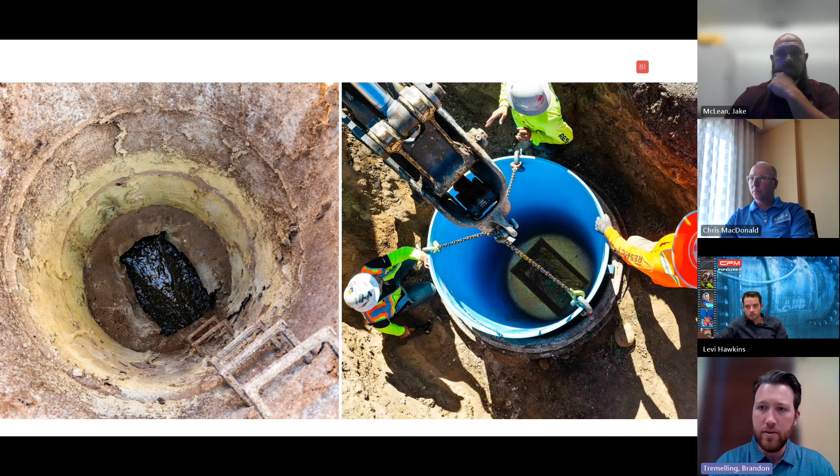I'm going to move over to our Q&A questions now. Going back to the beginning, what type of loading limits does this have from tractor trailers, heavy pavement loads? Does the old structure carry those loads, or does the new one? I hope that I've answered this already. This was a while ago, so probably before I talked about that. But HL93 LRFD loading, it has been tested for, and we can certify that as well.

Next one, how is the base channel liner seal between it and the pipe created? Jake, I think, answered that question with the Quick-Lock system, about the expansive resin and the 316 stainless steel that provides that corrosion resistance. Oh, and you just posted a response, so thank you, Jake, for doing that. David asked, as the sewer flow is less than clean, how does the sewage impact the seal's bond between the pipe and liner?

Jake, do you want to answer that one at all? About using the Quick-Lock system in a live flow situation? You're muted. Yeah, very little. I mean, typically when we're installing Quick-Lock, you're going to clean the pipe as best you can beforehand. But that grout is nasty sticky.

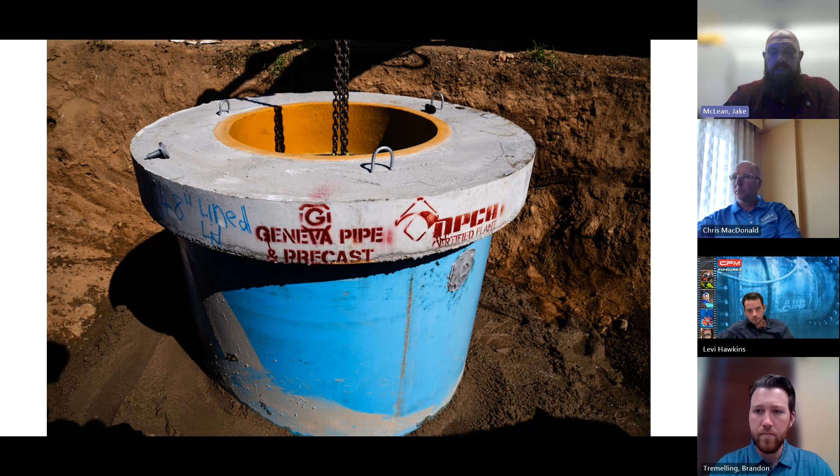The first install I ever did, I got it on my hands, thought it'd be a good idea to rub some dirt on it to get it off. And 3 weeks later, I'm still picking it off my fingernails in the shower every night.

So yeah, you want to get the pipe as clean as you can. Debris is a problem, but just some dirty water is not. You'll get a perfectly fine adhesion. And I'll also speak about once that Quick-Lock system is in place that has bridged the gap from pipe to the liner, any residual moisture that is behind the liner itself, when we pour in that high flow, high strength, fast setting grout, concrete cures underwater, right? So any water and moisture down there is not a problem.

And any sort of corrosive elements are going to be a micro film between the existing structure and that new grout that has gone in there, and will be irrelevant as that cures. The process is actually expansive. So any little corrosive elements that do affect that bond are literally just expanding and providing additional compression in that bond there. Let me see if there are some new posts.

Couple last questions from Tyler. Is this method cost competitive for new installs compared to concrete manhole costs? And how does PVC rehab cost compare to a CIPP liner? Chris or Levi, do you have anything you want to add there? Yeah, just like anything you're going to use that's highly corrosion resistant, if you've got typical neighborhood flows in 48-inch diameter manholes and they last 30, 40 years when they're made out of concrete, that's probably not the ideal situation to use these types of systems. They certainly can be used there, and they're not that much more expensive when you look at new construction, to be honest with you.